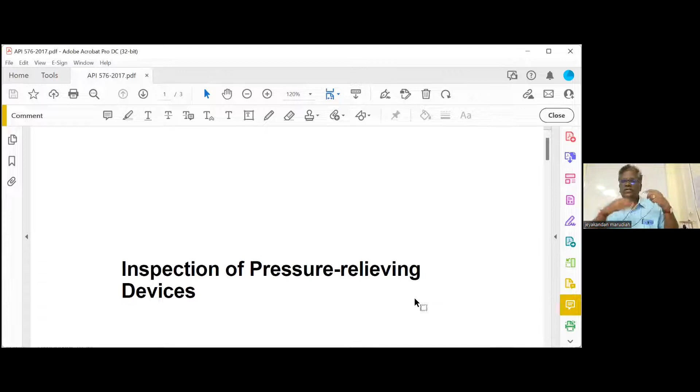Just maybe another 10 minutes only.

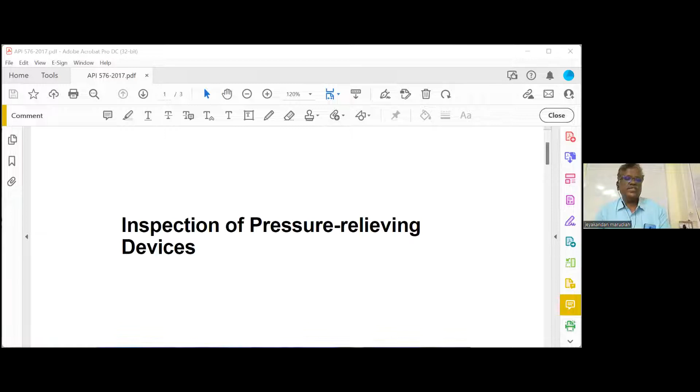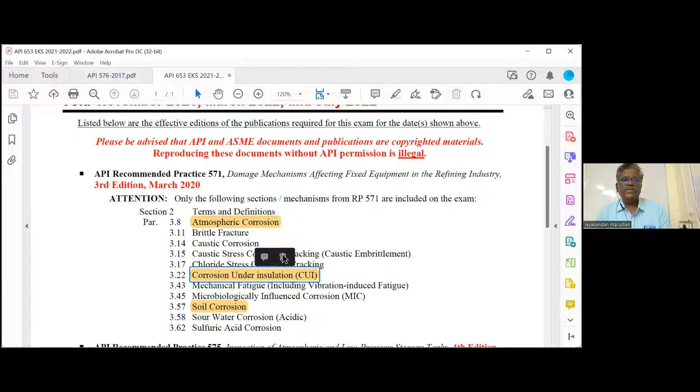576. Okay, if you take 576, so for our exam we have only 4.3.2 under 6.6. Maybe one question exam. See, I think that might be attached in some other books. Which book they attached? 575, 575, okay no problem. Yeah, on page 6.

So what? Yeah, pressure and vacuum vent.

Right, first you should know what is meant by pressure and vacuum relief valve. PVRV we call it. So this is how this pressure and vacuum relief valve works.

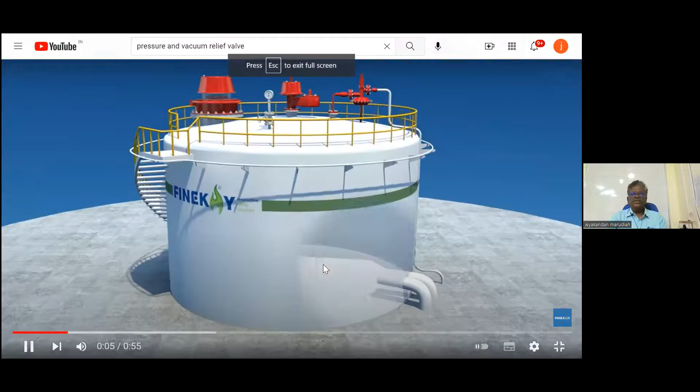See, when you are filling the tank, there will be air pressure buildup. To relieve that pressure and vacuum, there is a weight loaded. It will lift the weight and release the air. So the pressure will become zero.

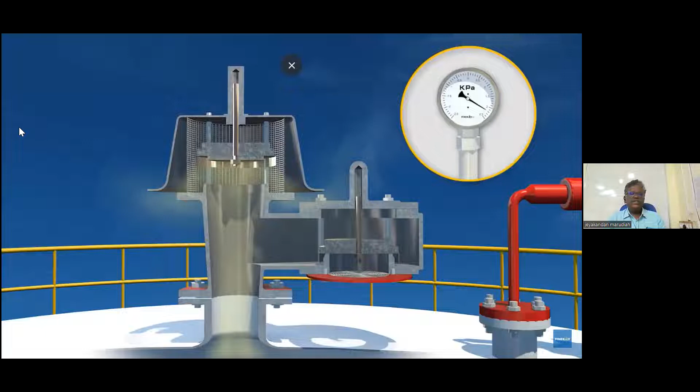And the reverse, when you are draining the tank, it will open this side and allow the air inside. That is the purpose of PVRV, pressure and vacuum relief valves, or we call it as breather valves.

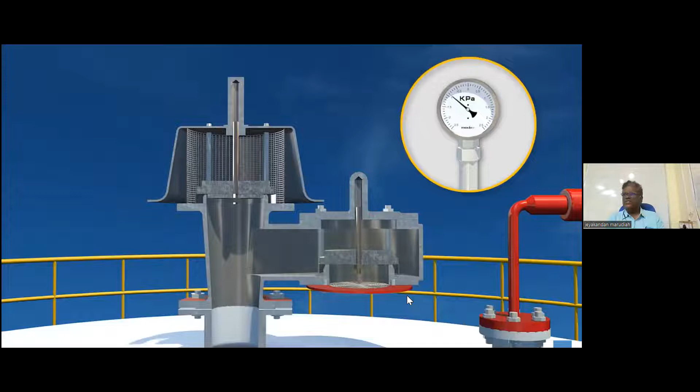So if you go to the code book, 4.3.2, we have only 2 pages, 2 pages. Okay, because it is just maybe one question only. 4.3.2 under 6.6. Now generally, if you take another pressure relief valve, for example safety valve, relief valve, and safety relief valve, they are spring loaded.

The spring tension only they are lifting. But here PVRV is weight loaded. These are called weight loaded. So the weight will be equal to the atmospheric pressure. When the inside pressure exceeds the atmospheric pressure, it will lift and release the pressure. That is the function of this.

So highlight this one. These devices are used on pressure and vacuum protection applications where operating pressure is very near atmospheric condition, because these valves cannot be used in high pressure. You cannot use this pressure and vacuum vent valve in pressure vessel or piping. They can be used only in atmospheric storage tanks.

What is the purpose of this? They are often used to satisfy the normal venting requirements caused by thermal in-breathing, out-breathing, and product pump-in and pump-out effects. You know what is meant by pumping? When you are filling the tanks, there will be a pressure buildup. They will open and release by weight. The weight will be lifted.

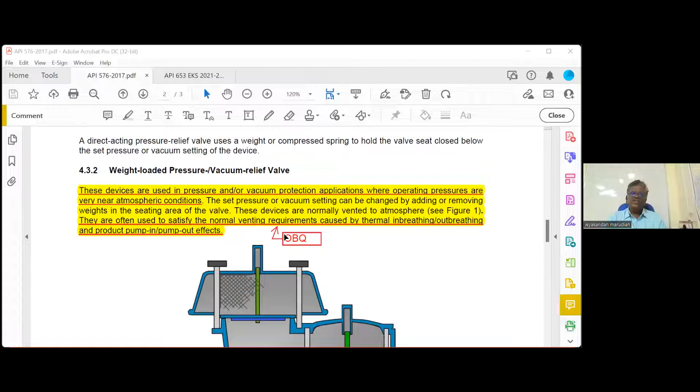So again, I will repeat. These devices are used in pressure and vacuum protection where operation pressures are very near atmospheric condition. That is important, this is an open book question. They are used to often satisfy normal venting requirements caused by thermal in-breathing, out-breathing, and product pump-in and pump out effects.

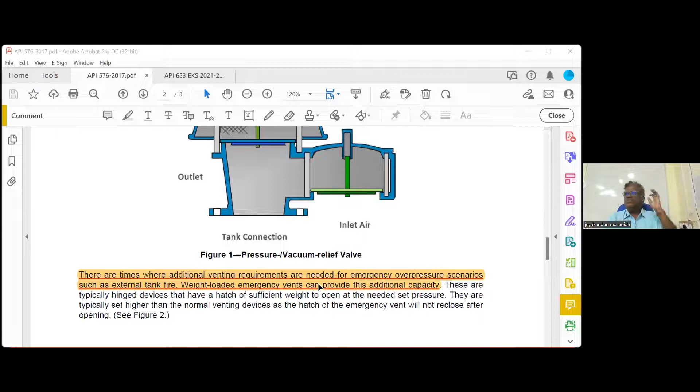This line is also important. There are times where additional venting requirements are needed for emergency overpressure scenarios such as external tank fire. Weight-loaded emergency vents can provide this. Suppose there is a fire outside, there will be a sudden pressure buildup because fire will evaporate the oil very quickly. Then also they will help in these conditions.

Next one is 6.6. So this is the 6.6. What is the problem with these valves? In winter season, severe winter, suppose ice formation is there, this valve may not lift it because of the sticking. Sticking means that the plates are sticking together, that may be the problem.

PRV is pressure relief valve, that is a common terminology. PVRV is pressure and vacuum vent valve, both.

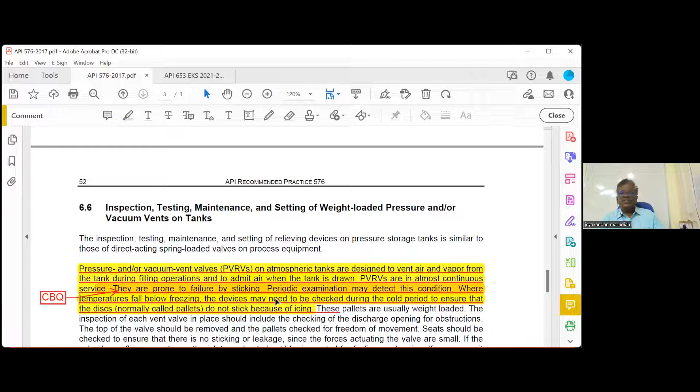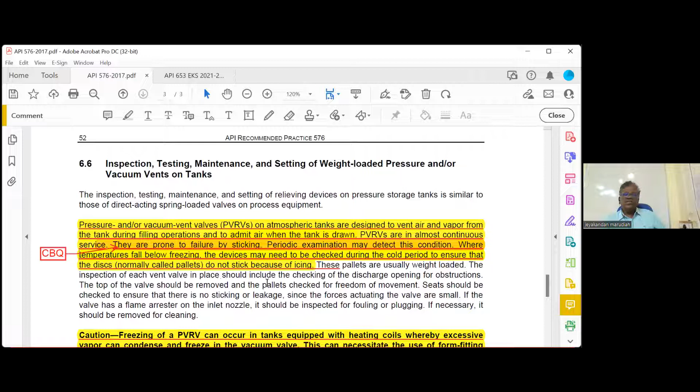Where temperature falls below freezing, the devices may need to be checked during the cold period to ensure the disc, normally called, does not stick because of the icing. These pallets are usually weight loaded. The inspection of each vent valve in place should include the checking of discharge opening obstructions. So these are important, then highlight this one.

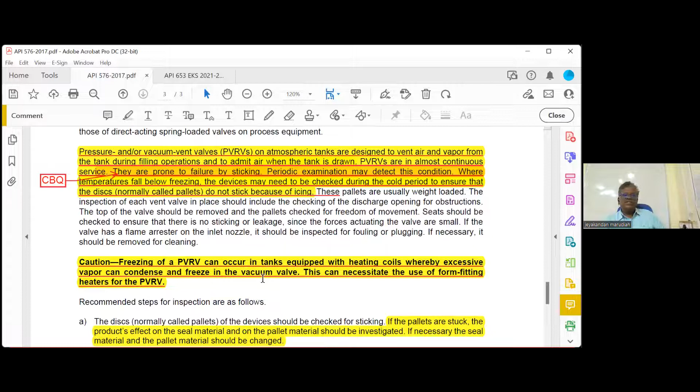Freezing of a PVRV can occur in tanks equipped with heating coils, whereby excessive vapor can condense and freeze the vacuum valve. This can necessitate the use of form-fitting heaters for the PVRV.

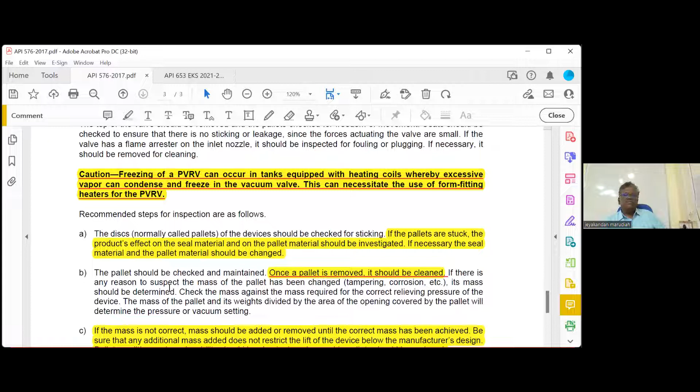Then what are the recommendations? Highlight this one: once a pallet is removed, it should be cleaned. We have to clean this one. That's all, others are not important.

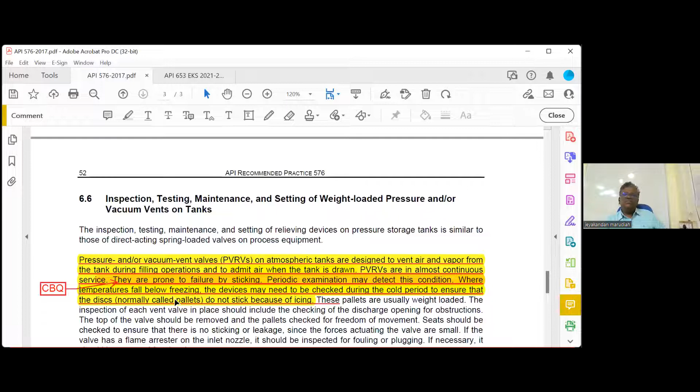Just only two, maybe one question. What is the major problem? They may be sticking, sticking is the important one. You have to clean properly. And here, this line is important: they are used in operating pressure very near atmospheric. They are used for normal operating venting and thermal in-breathing and out-breathing.

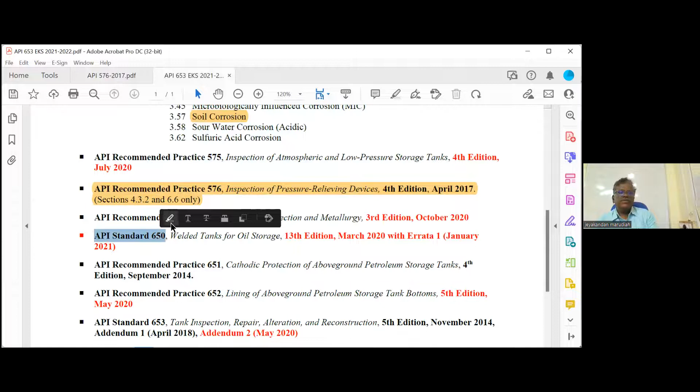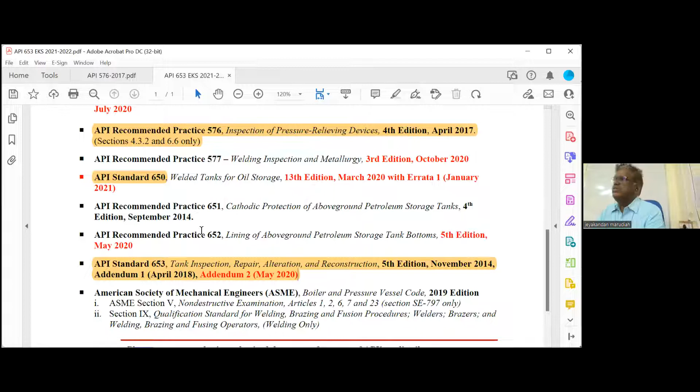So 651 talks about the cathodic protection of storage tanks and 652 lining. Both will lining means it is inside. There are three types of lining: thin film lining, thick film unreinforced lining, thick film reinforced lining.

Yeah, lining means we can remove it after that. If you use the word coating, it cannot be removed. That is the difference between coating and lining. Lining can be removed. So what is the purpose of lining? It is to protect the product side from the water corrosion. What is the purpose of cathodic protection? To protect the bottom side from the soil corrosion.